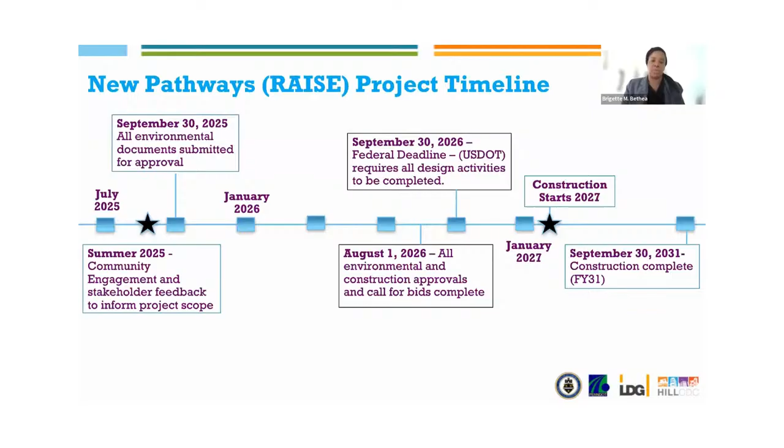So that construction time is a bit longer, but again, as Marimba shared, this is a way that we'll be able to see some direct investment and changes in the neighborhood.

So about the New Pathways Project team, the city of Pittsburgh serves as the project lead for this project, but that's in conjunction with a really robust and expert team to support this work: the Pennsylvania Department of Transportation, Larson Design Group, the Hill CDC, which is really focused on the stakeholder engagement and the community engagement aspect, with the support of Evolve Environment and Architecture and ULEAD.

So let's get into some level setting so that we're all on the same page. What is public right of way? A public right of way is really land that's reserved for public use for transportation, including streets, sidewalks, curbs, ramps, city steps, and all those things associated. Think about the things we experience day-to-day along our routes that impact the greater good.

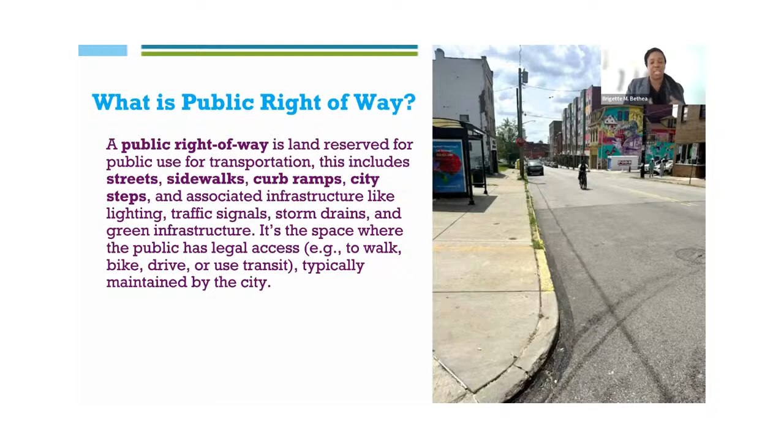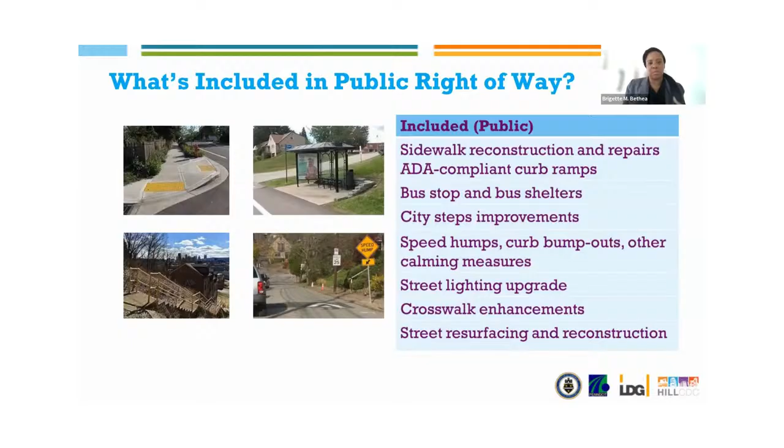So what is included in the public right-of-way? Think about sidewalks and sidewalk repairs, ADA compliant curb ramps, bus stops and shelters, city steps, speed humps, bump-outs, and calming measures. You'll hear that a lot during my presentation, as well as street lighting upgrades, crosswalk enhancements, and street resurfacing. There are other things, but these are some of the major items that show up in the public right-of-way.

What's not included in the public right of way? It's just as important to know what's not included as what is, so that we can give the proper feedback. So you want to think about things like private residences, porches, stairs, balconies, driveways, retaining walls, fences—all the things listed here that don't fall within the public right of way, whether it be a private residence or a private business.

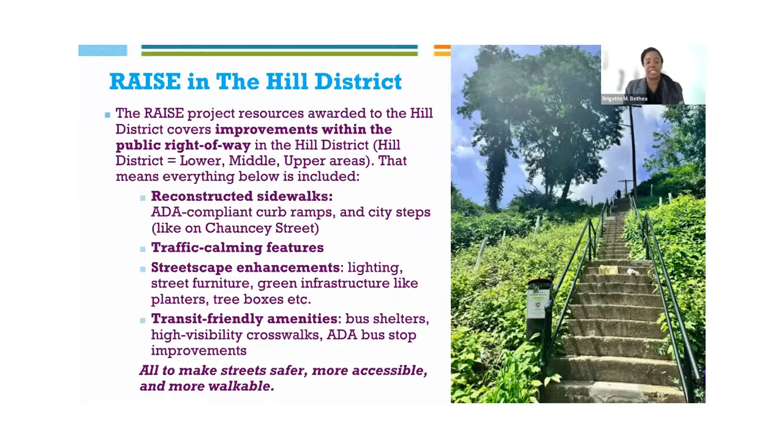So RAISE in the Hill District, drilling down even further and thinking about how these improvements will show up, we're talking about the lower hill, the middle hill, and the upper hill areas. When we talk about the new Pathways Project in RAISE, we're specifically talking about these areas, again all to make the streets more safe, accessible, and more walkable for those in the area.

We'll also talk a lot about sidewalks, which show up as low priority, moderate priority, and high priority. Low priority might have some cracks, maybe a little difficult to traverse—say if you have a stroller or are in a wheelchair—but generally you can still get across them. Moderate priority has more cracks, more dips, and this may be a time where people need to be in the street to avoid these areas. High priority shows up in spaces where maybe there is no sidewalk at all.

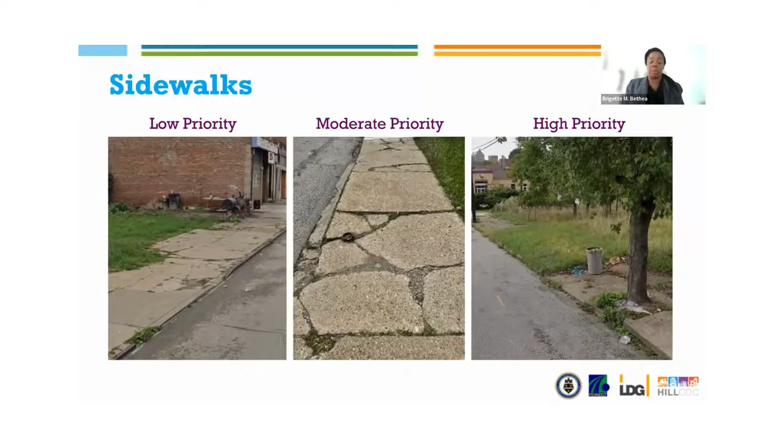So just as we're going through the presentation, be thinking about what you may be experiencing as it relates to sidewalks as well. So, bump outs and curb extensions.

These things really help to improve safety. They help to calm traffic and overall enhance the streetscapes. If you look at that picture on the bottom left, the one that's tilted, that's a bump out in East Liberty—a great example of where cars are able to park inside of that area. The bump out creates a shorter distance between one part of the street and another for those crossing. You see the ADA compliant ramp there—just the ability to transit this area more easily, for cars to see pedestrians and for pedestrians to see cars.

Bottom right is one that's a little more fancy, but also a bump out nonetheless. And then up top, you're looking at an area that could possibly use a bump out. When you see this area, if I was standing here and wanted to cross the street, it would be a lot easier and a shorter route if there was a bump out here, or a lot easier to get on and off the bus.

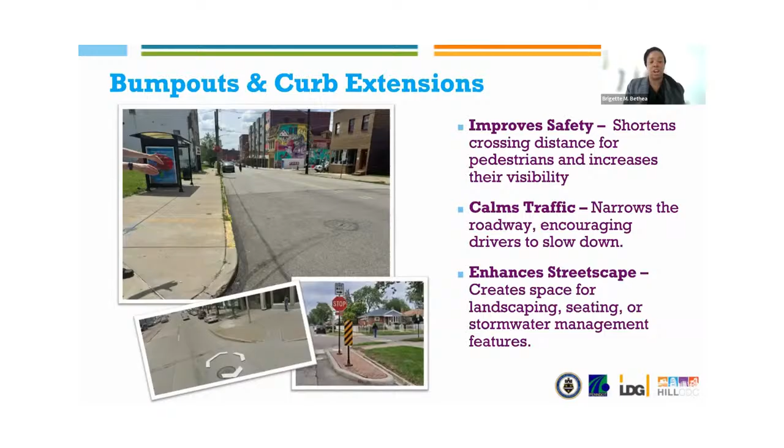So we're going to dig down deep into talking about Centre Avenue and the Centre Avenue corridor, and improvements that could happen along those areas. Now, we are well aware that that is not the only place we need improvements, and so again, we want to hear from you and learn about what other areas could be a priority. But we'll spend a lot of time today really talking about this.

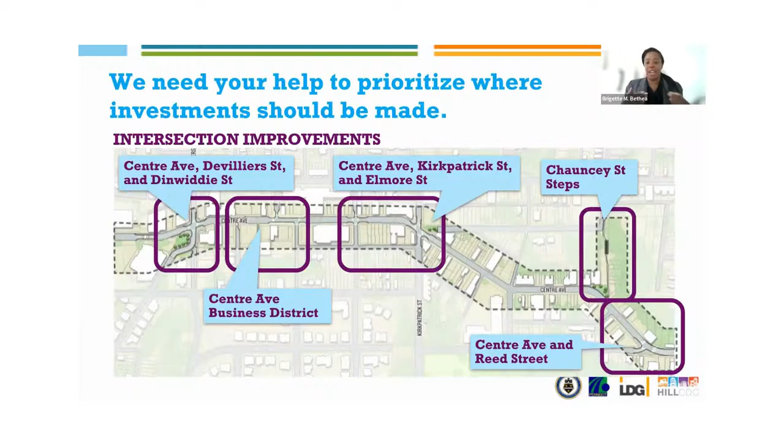So we're going to be talking about Centre Avenue, Devilliers Street and Dinwiddie, the Centre Avenue Business District, Centre Avenue at Kirkpatrick and Elmore, Centre Avenue at Reed Street, the Chauncey Street Steps, and then Chauncey and Bedford, which isn't shown on this map.

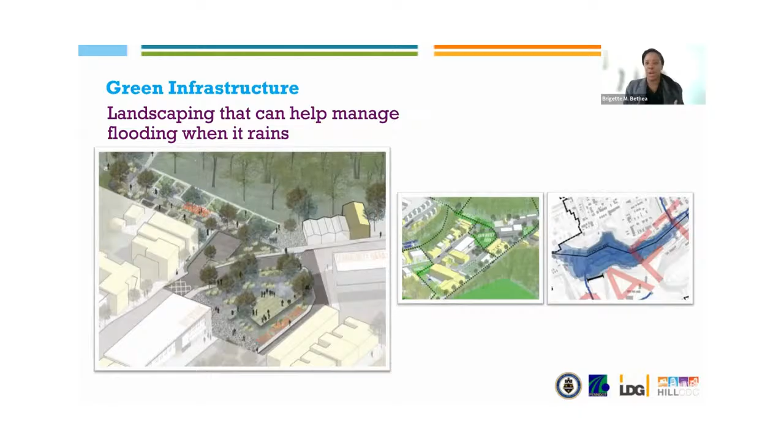So we really need your help to prioritize these right-of-way enhancements. Other things we can be thinking about are green infrastructure, ways that we can make the space more beautiful, public art, public plazas, and expanded sidewalk improvements along the way. This is just an example of what green infrastructure and landscaping can look like, but it also helps us manage flooding when it rains.

All right, we're going to dig deep and talk about the Centre Avenue, Devilliers Street, and Dinwiddie Street intersection. Looking at this map, you can see what the current state looks like. That current state is where this particular intersection shows up as about a five-way intersection and can be confusing for folks who are transiting this area.

Where the recommendation comes in is creating a raised crosswalk on Centre Avenue and realigning Dinwiddie and Devilliers to align those intersections, and then reclaiming a portion of Dinwiddie Street to create open space along Centre Avenue. You can see that with that little tree area on the slide, and so this would be the recommendation in this area.

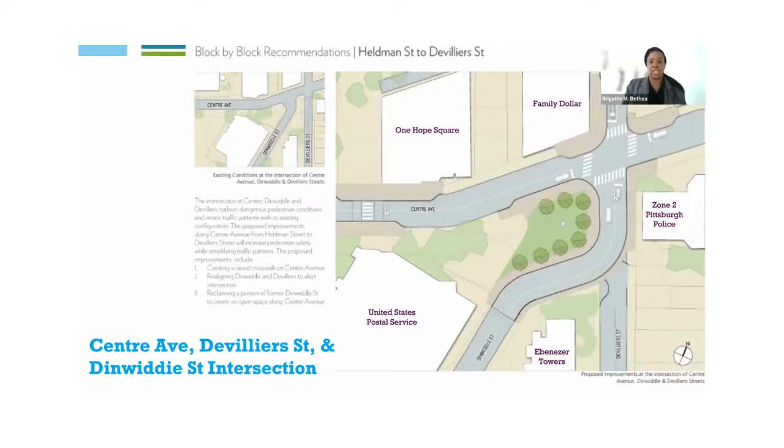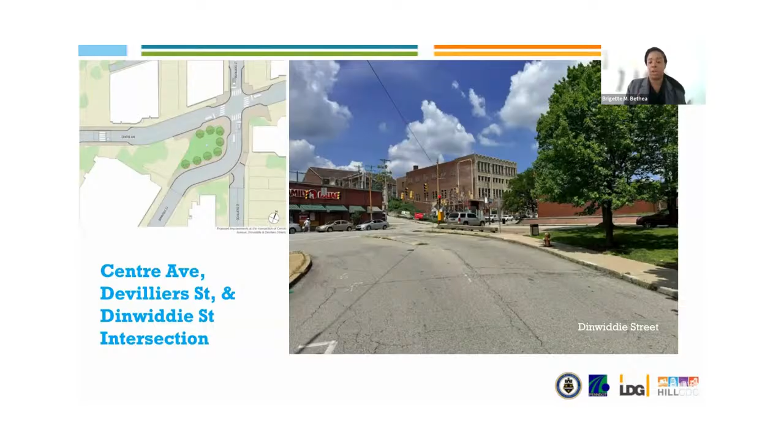This is showing you a vantage point, looking up towards Centre Avenue from Dinwiddie Street, and further illustrating that this is a confusing space as it relates to turning and walking. If you're in a wheelchair, or any type of transiting this area, it can be very, very confusing.

All right, the next location we're going to talk about is the Centre Avenue Business District. So we've added kind of where we're at, showing Big Tom's Barbershop and that area as well.

Recommendations here show up in creating bump outs and high visibility crosswalks along Centre Avenue at Grove Street, creating continuous bump outs along Centre Avenue between Erin Street and Addison, providing high visibility crosswalks at Addison and Erin Street, and installing bump outs along Erin Street. Overall, this creates a safer environment for those transiting this area to flow through the business district.

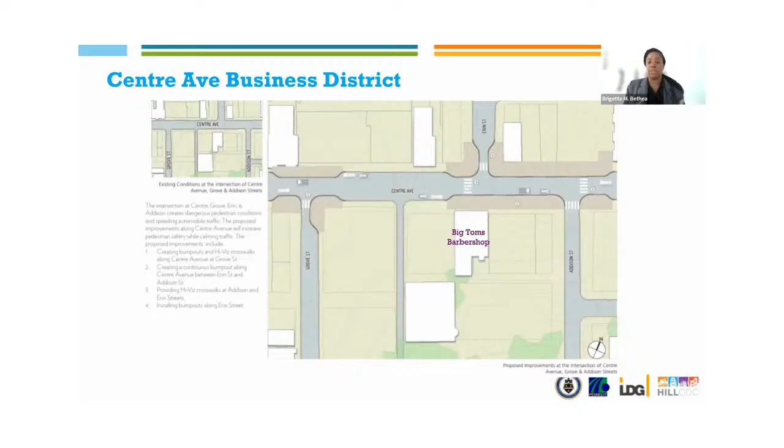The next location we're going to talk about is Centre Avenue, Kirkpatrick Street, and Elmore. Again, this is another area that shows up almost as a five-way intersection with Mahon coming into Centre Avenue as well. The recommendation here is creating bump outs and high visibility crosswalks along Elmore and at Centre Avenue and Kirkpatrick, and dead-ending Mahon Street.

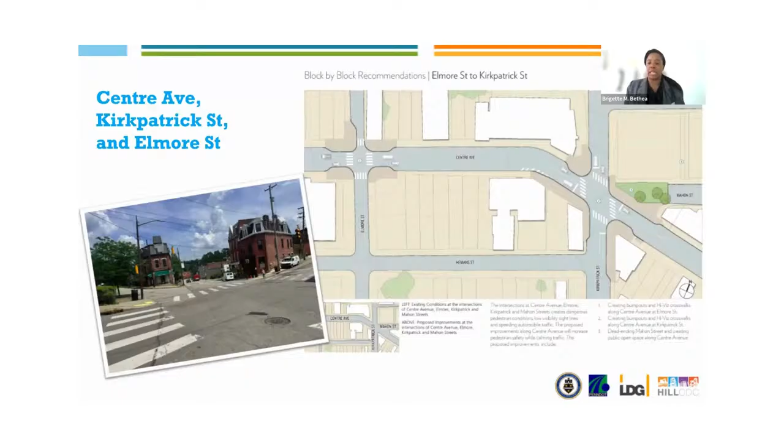As you can see where Mahon sits leading into Centre Avenue, creating a sidewalk there and some open space in that area as well. This is showing you where Mahon goes into Centre Avenue, where Central Baptist Church sits in this area. This would be the area that would potentially be dead-ended, with open space and sidewalks added.

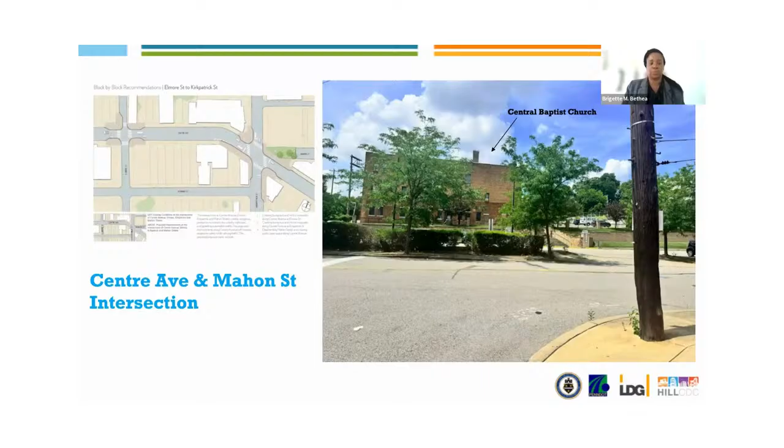The next location we're going to chat about is the Centre Avenue and Reed Street intersection. I've shared with everyone that this is an area where I myself have walked and have almost been hit twice. This can show up as a dangerous area for pedestrians. We've also learned there are lots of children who walk in this area. The recommendation is adding high visibility crosswalks at the intersection and creating bump outs along Centre Avenue to allow for safer pedestrian crossing.

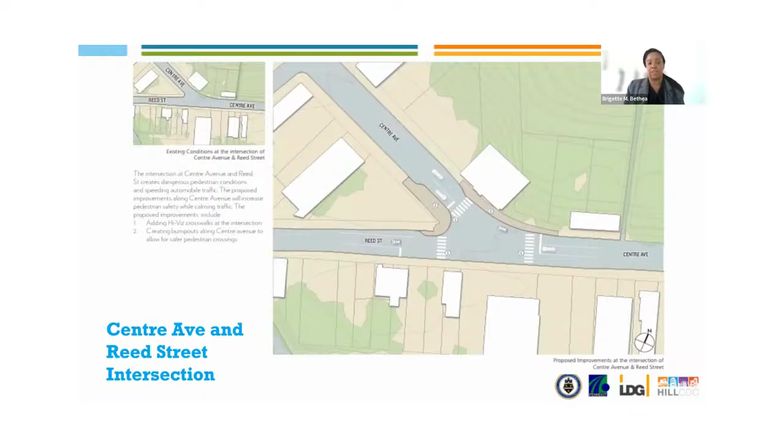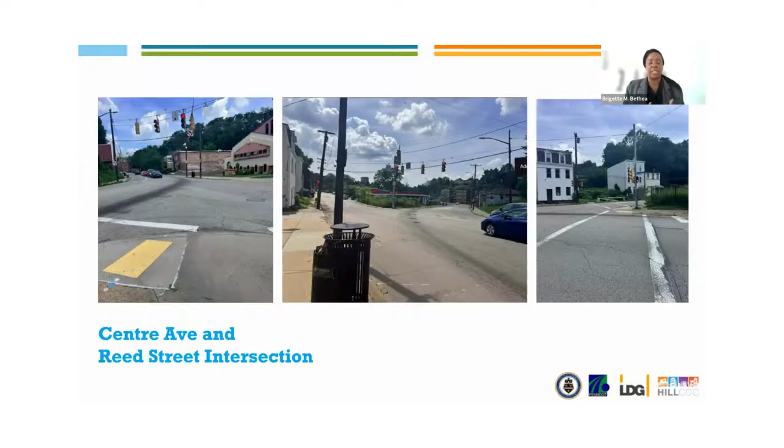This is showing you some photos of what it looks like at the current state. You can see the crosswalks are really tough to see and to tell where they are, so we're thinking about those sidewalks and crosswalks in this area. Additionally, the city is looking at addressing stoplights and timing for those stoplights along the Centre Avenue corridor, including this area.

The next location we're going to talk about is the Chauncey Street Steps. This is located just right up the street from Reed and Centre that we just talked about.

In this particular area, the recommendation here is to replace the pedestrian staircase and lighting at the stairs, and also replace sidewalks along Centre Avenue, and then create some open public space adjacent to the sidewalks.

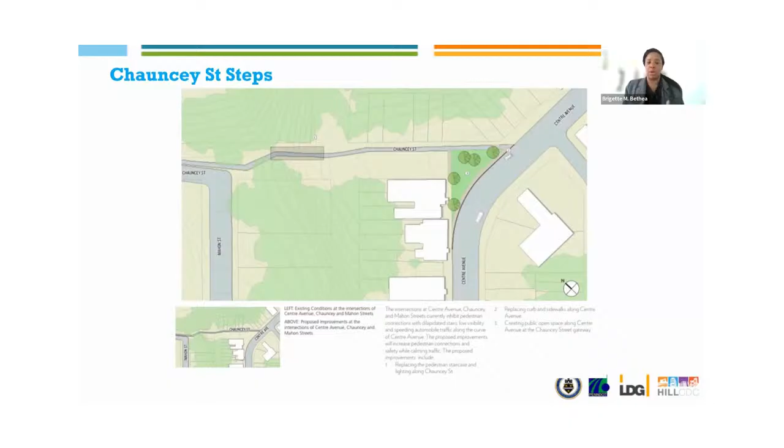This particular sidewalk leading to the Chauncey Street Steps has already been improved, but the steps themselves do need to be repaired, and there really isn't a lot of lighting there. So creating a safer environment is going to be key with this infrastructure upgrade.

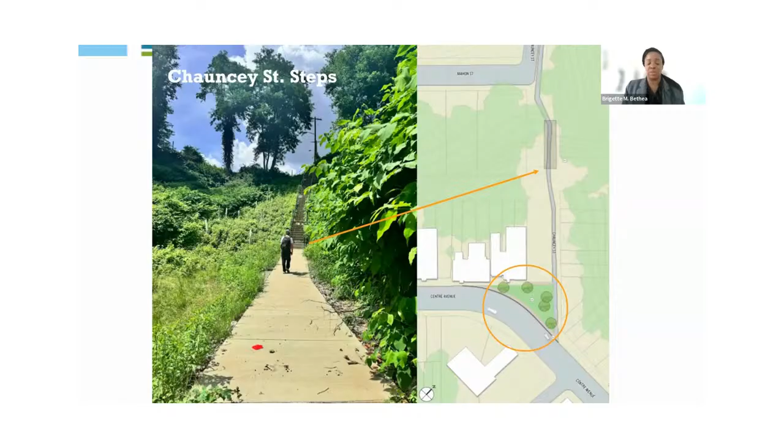This young man you see here walking up the steps, we also saw him up on Bedford Avenue. These steps are being used by community members, and we want to make sure they are safe and usable for them.

This is just showing the area where the open space could be, leading to the walkway back to the Chauncey Street Steps.

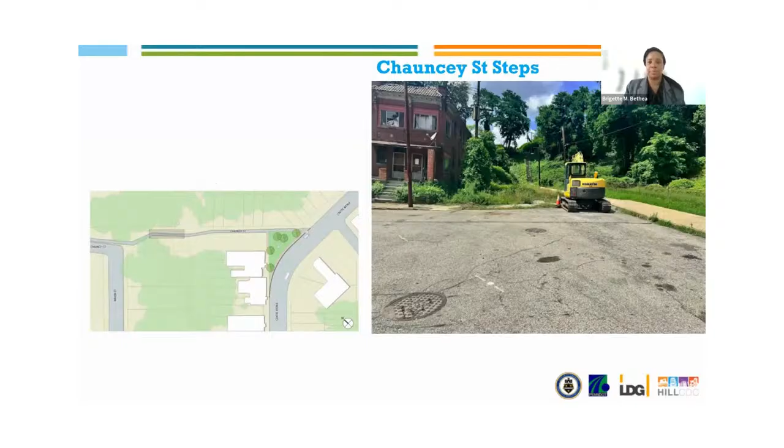The next location we're going to chat about is Bedford Avenue at the Chauncey Street intersection. We see this really as an extension of the Chauncey Street Steps. So if you are using the steps from Centre Avenue, going up to Bedford Avenue, or anywhere in between...

The possibility here is really adding a sidewalk to make that safer, so folks didn't have to walk in the street, and to be able to get from one part of the Hill District at the top all the way down to the bottom at Centre Avenue.

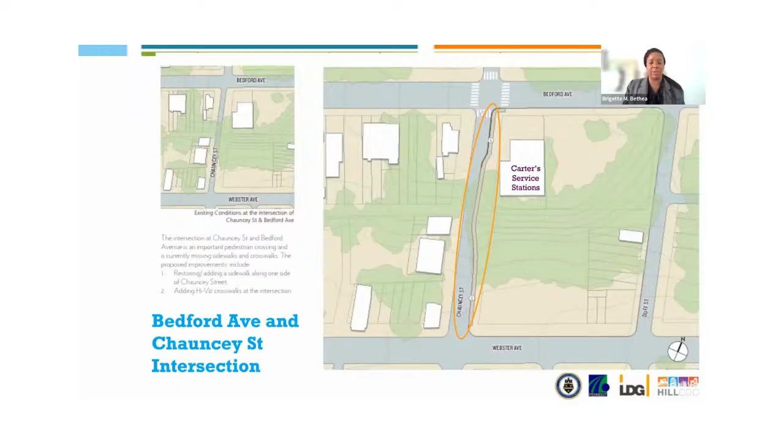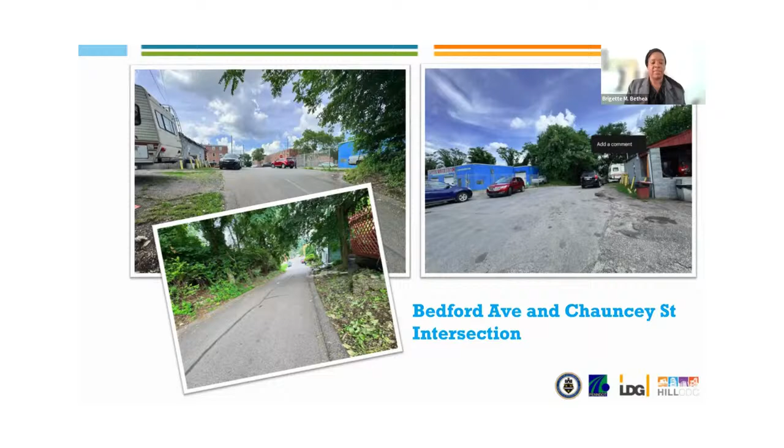This is just showing the businesses that sit in that area, as well as the grade of that particular stretch of Chauncey Street, and how on the left-hand side of the bottom picture is where the possibility of the sidewalk could go.

The last area we're going to talk about, but certainly not least, is Centre Avenue. This is really from 6th Street to Crawford Street, close to the arena. We know a lot of people transit this area to go to games, events, or different things happening in the area.

Along this stretch of Centre Avenue, the recommendation is pretty much the same: to really create better visibility as it relates to crosswalks, but also to widen the median to ease traffic and make it easier for crossing the street in this area.

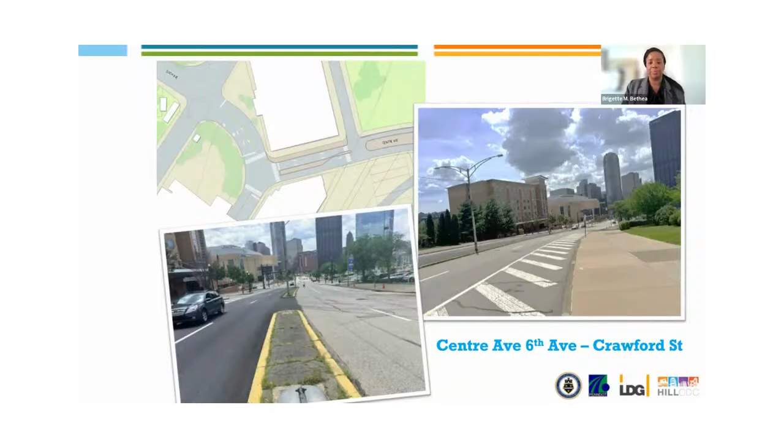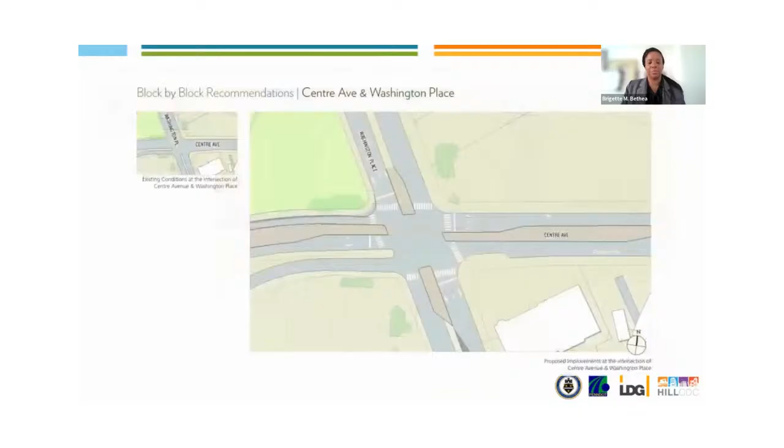I'll just go through these slides. This is showing along that route, since it's a pretty long route, giving you a chance to see the different spaces along there, starting or ending at 6th Avenue, depending on the direction you're going.

So to bring it all back, your input is extremely important. One, because it helps us prioritize what's most important and how the engineers should be looking at the work that they're doing. But again, improving safety and connecting our neighborhoods continues to be a priority in this space. Feedback is due no later than September 11th.

We're really looking at you to be able to get that feedback to us. So what's next, what's needed? We have a stakeholder meeting upcoming, and we will continue to have some community meetings upcoming as well.